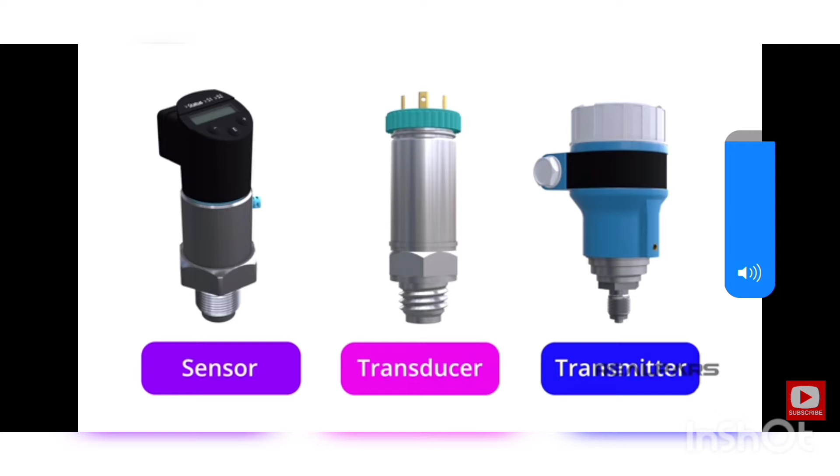Over the years, the terms sensor, transducer, and transmitter have become confusing because they're often used interchangeably and indiscriminately by different vendors. The terms sensor and transducer have been around for a very long time, but in the world of process control, the term transmitter is not very old. In particular, the term transducer is tossed around as a name for many devices and instruments.

If you conduct a web search of the terms sensor and transducer, you'll get lots of different definitions. Many organizations have their own definitions. Just to confuse the issue, sensor and transducer have often been used as synonyms.

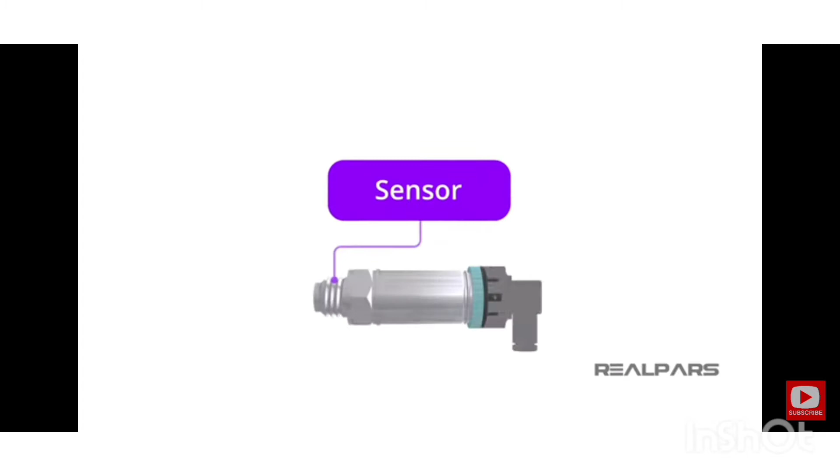Okay, let's start with some suitable definitions that we'll use in this video. A sensor is a device or element that performs the initial measurement as it senses changes in a physical variable. A sensor is a device that makes physical contact with the variable being measured, detects changes, and provides a corresponding output signal that can be measured.

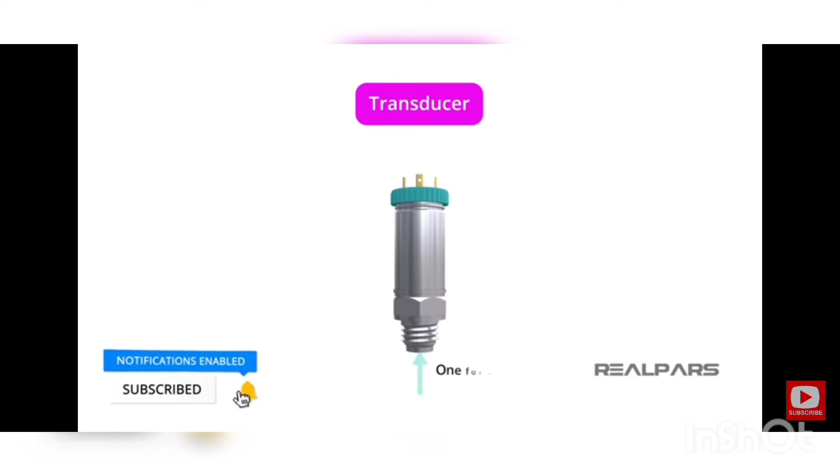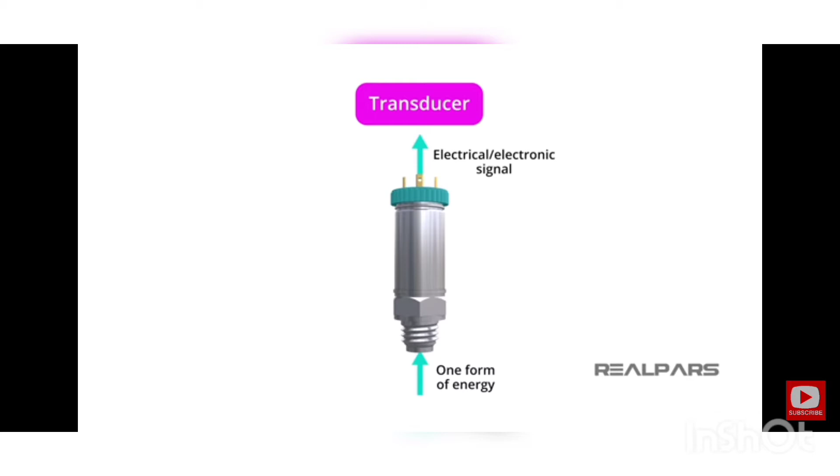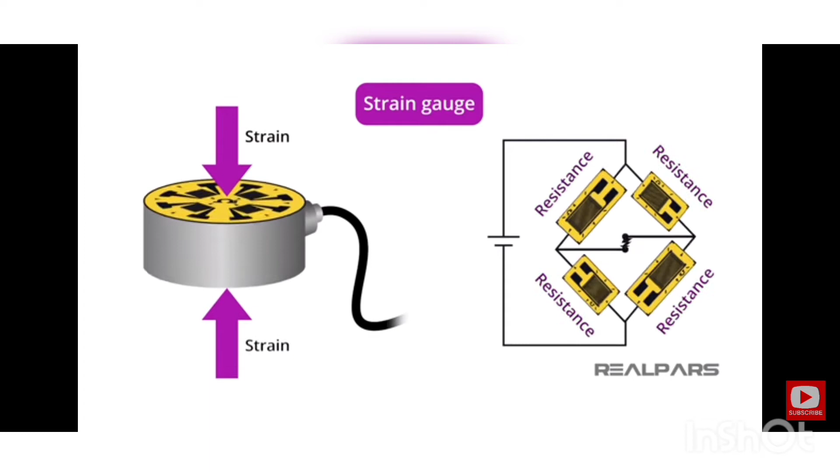A transducer is a device that converts one form of energy to another. A transducer provides an output quantity having a specified relation to an input quantity. In the field of instrumentation, the output quantity is an electrical or electronic signal. So we say that a transducer measures pressure, load, force, or other states, and converts the reading into an electrical or electronic signal. For example, a strain gauge is a transducer whose resistance value changes proportionally to the strain it experiences.

Here's an interesting statement: all sensors are transducers, but not all transducers are sensors. What do we mean by that? Well, consider a loudspeaker that converts an electrical signal into motion. The loudspeaker is a transducer, but not a sensor.

All right, let's talk about the term transmitter, because it has more than one definition. The process control term was likely borrowed from the telecommunications world, where a transmitter is a device that produces and transmits radio waves radiating from an antenna. These radio waves are eventually detected and demodulated by a radio receiver. The receiver produces sound waves for the human ear.

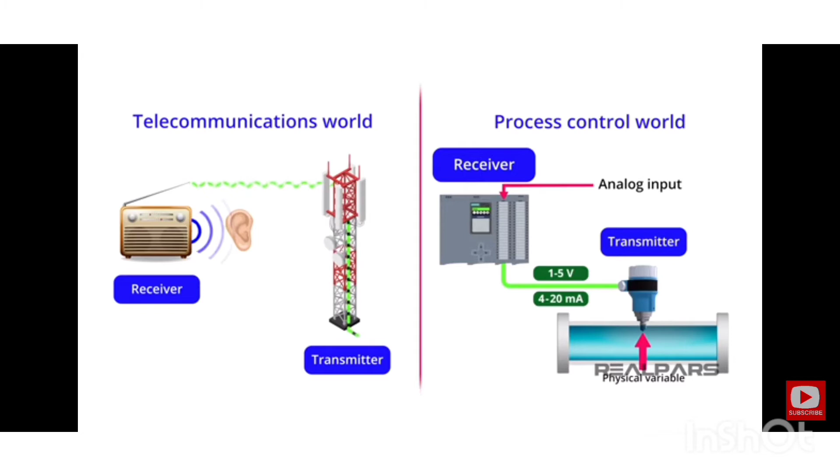In the world of process control, a transmitter is a device that transmits a standard instrumentation signal representing a physical variable being measured. The standard electrical signals are 1 to 5 volts or 4 to 20 milliamps, which represent 0 to 100% of the physical variable being measured. This transmitted signal is detected by a receiver, such as an analog input on a PLC or a DCS.

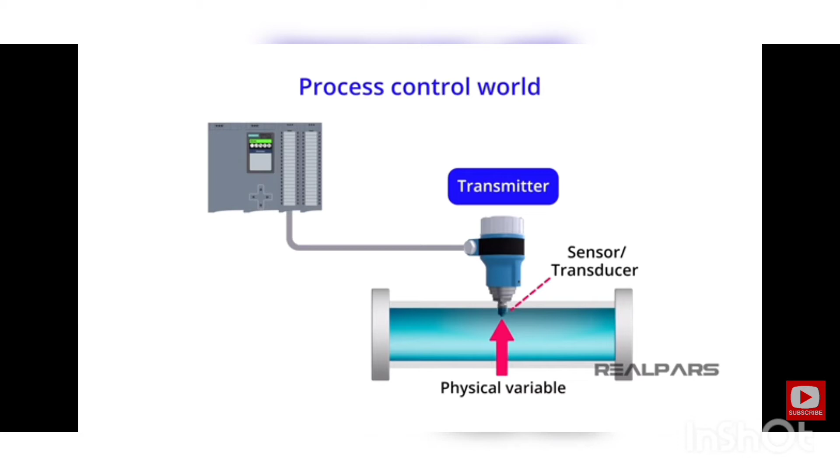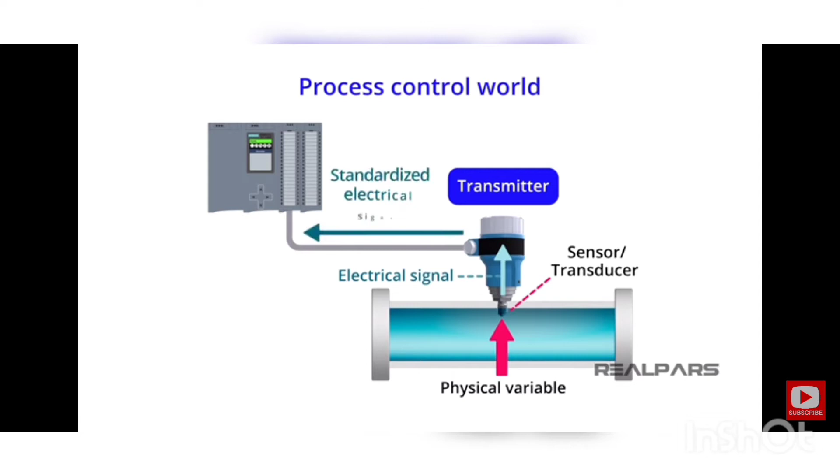So we just said that the transmitter signal represents the physical variable. How does the transmitter know what the physical variable is? That's where a sensor or a transducer comes into the picture. A sensor performs the initial measurement. If necessary, a transducer converts this initial measurement into an electrical signal that is then amplified and standardized by the transmitter.

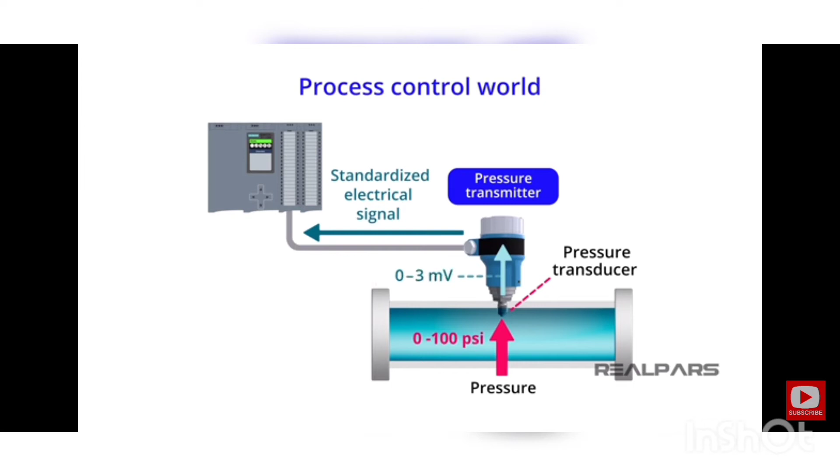Here's an example. We're measuring a process pressure with a range of 0 to 100 psi. Our sensor transducer performs the initial measurement and converts it to an electrical signal of 0 to 3 millivolts. The transmitter then converts that signal to a standard signal of 1 to 5 volts, which is received by a PLC analog input module. Many vendors use the terms pressure transmitter and pressure transducer interchangeably.

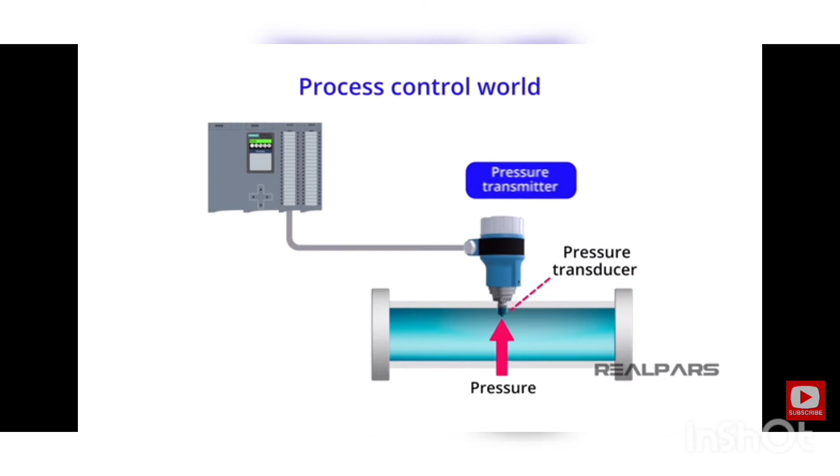But we now know that the two devices are not the same. So it's buyer beware. If you're curious, conduct a web search of the two terms, and you may be surprised at the results. Let's talk about a pressure switch.

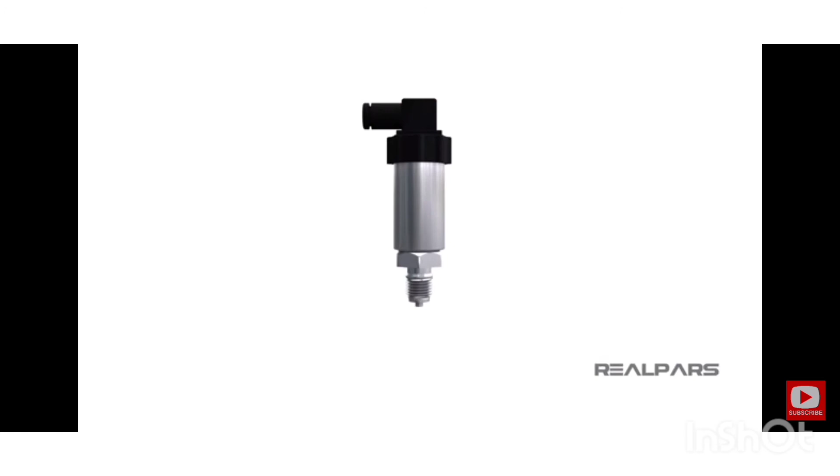A pressure switch is a two-part device consisting of a sensing transducer and an electrical switch. Is a pressure switch different than a pressure transmitter? There are some common components, but they are functionally very different. A pressure switch has a transducer just like a pressure transmitter. That's where the similarity ends.

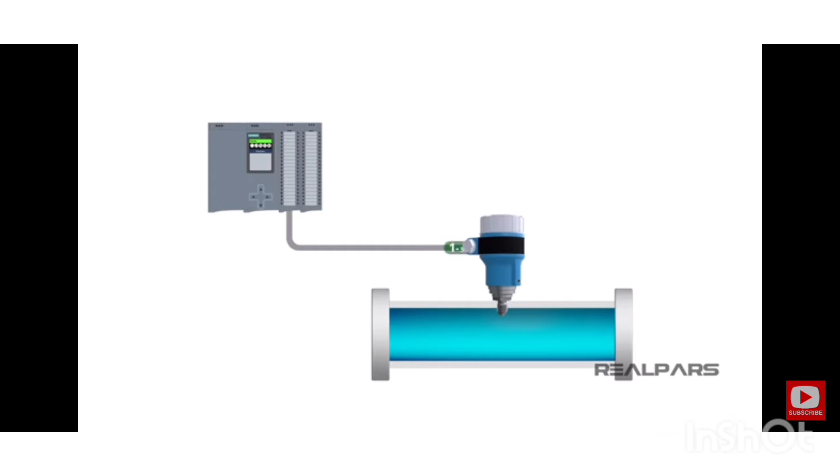As we've already discussed, a pressure transmitter produces an analog electrical voltage or current signal representing 0 to 100% of physical process pressure. A pressure switch has electrical contacts that open and close at a specific pressure.

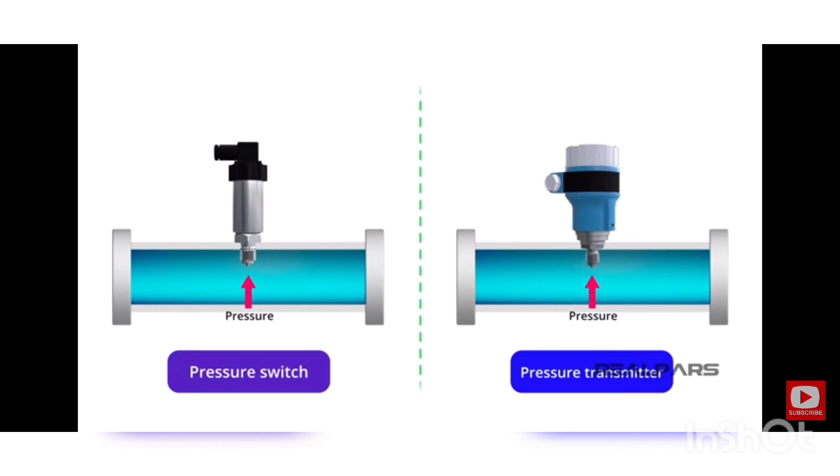Can a pressure transmitter be used to function as a pressure switch? The answer is absolutely yes. But is it really worth it? First of all, a pressure transmitter is larger, more expensive, and often more difficult to install. There are other deterrents as well.

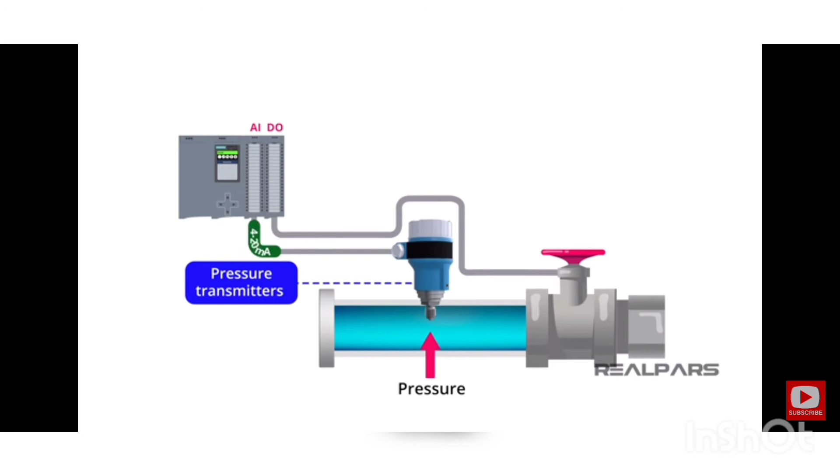Let's illustrate with an example. We have a process control system where we need to open a valve when the pressure in a pipe reaches 50 psi. We can use a pressure transmitter calibrated to produce a 4 to 20 milliamps output for a pressure range of 0 to 100 psi.

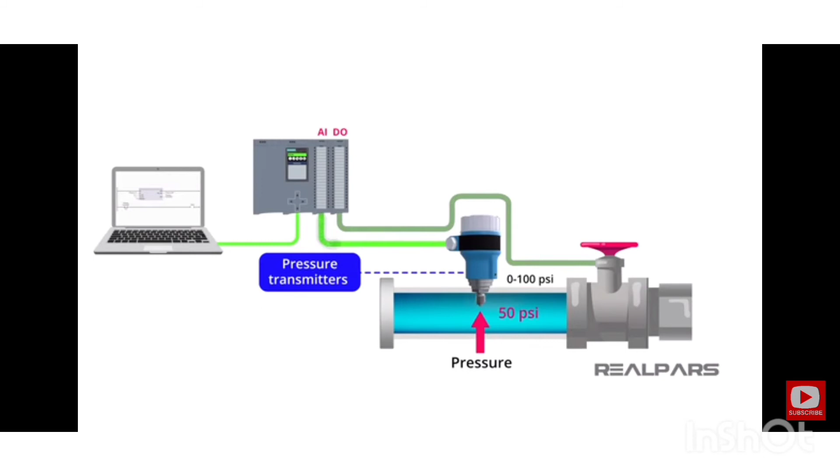We need an analog input module on our PLC, and we need to scale the analog module and insert code into the PLC program so that the 50 psi value triggers an event to open the valve. It's much easier to use a pressure switch connected to a simple PLC digital input module. The PLC valve control logic is much simpler as well. Bottom line, if you don't need to know the exact pressure and only need to know when a specific pressure point has dropped below or risen above a set point value, then stick with a pressure switch.

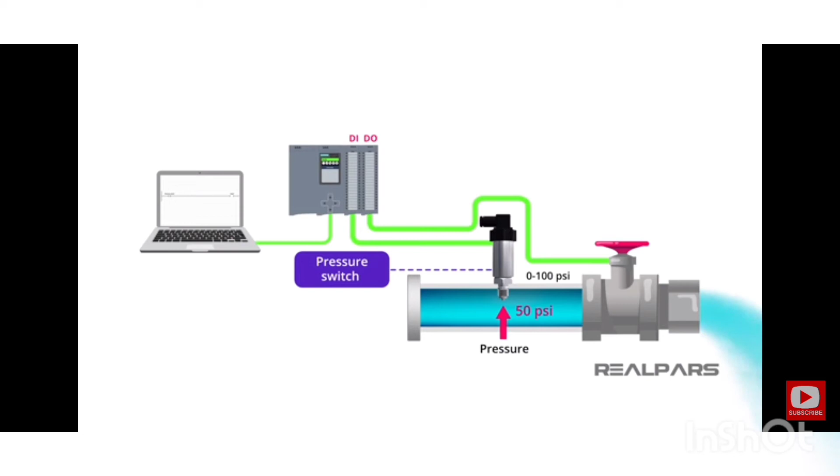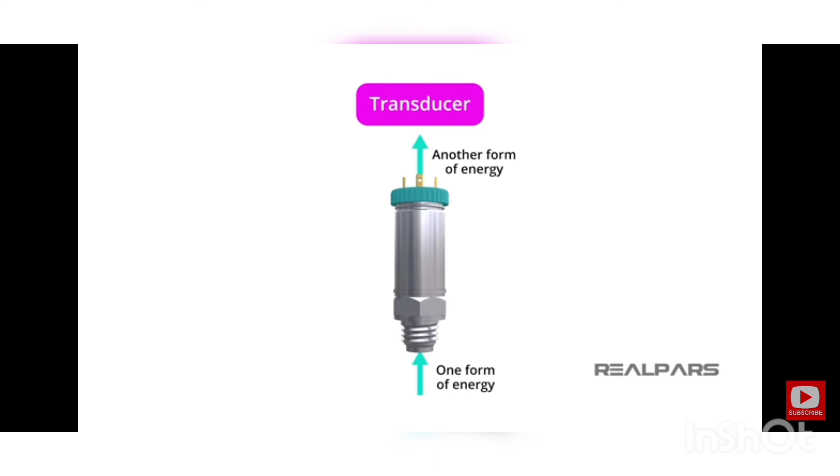Okay, let's summarize what we've discussed. A transducer is a device that converts one form of energy to another. A sensor is a device or element that performs the initial measurement of a physical variable. All sensors are transducers, but not all transducers are sensors.

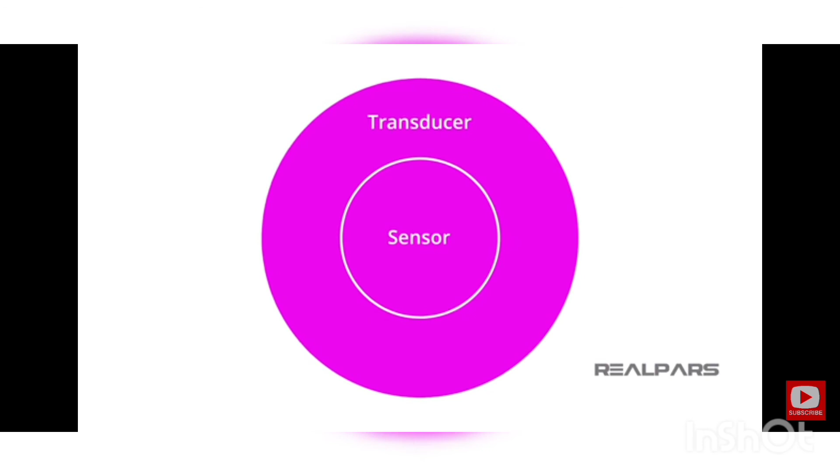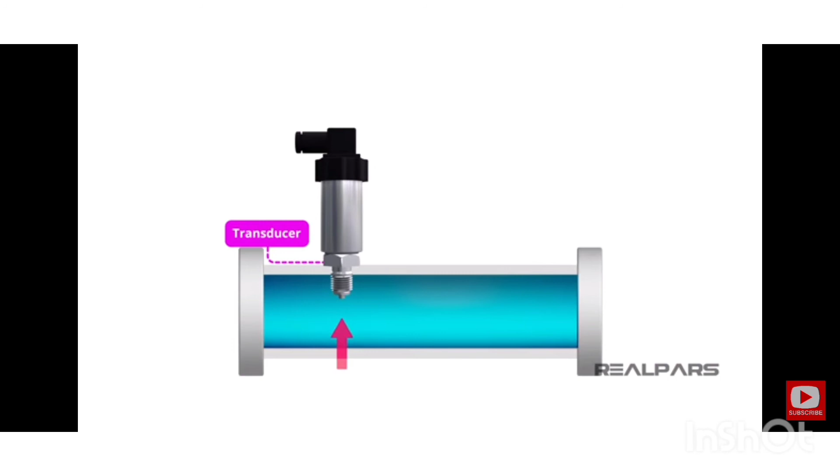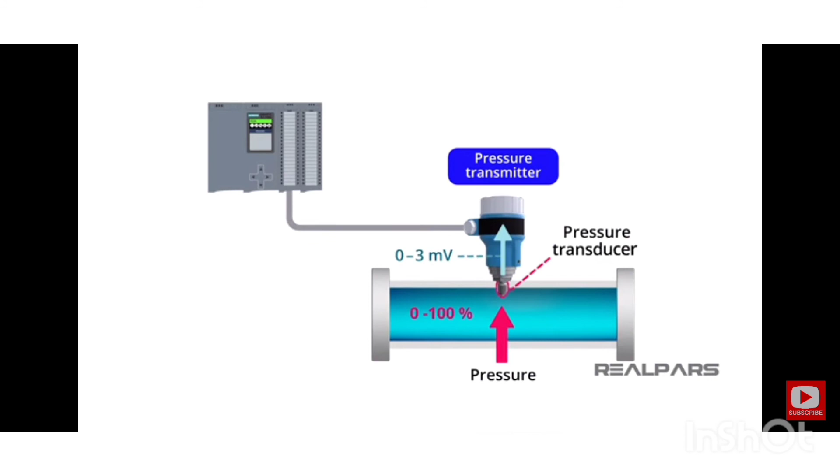All pressure sensors, pressure switches, and pressure transmitters must have a sensing transducer. A pressure switch consists of a transducer and an electrical switch that opens or closes a contact at a specific pressure. A pressure transmitter is a device that converts the electrical signal from the transducer into a much larger electrical signal. A transmitter output signal is usually a range of voltage, 1 to 5 volts, or current, 4 to 20 milliamps, representing 0 to 100% of the sensed physical variable. A pressure transmitter can be used as a pressure switch, but it is not practical to do so.